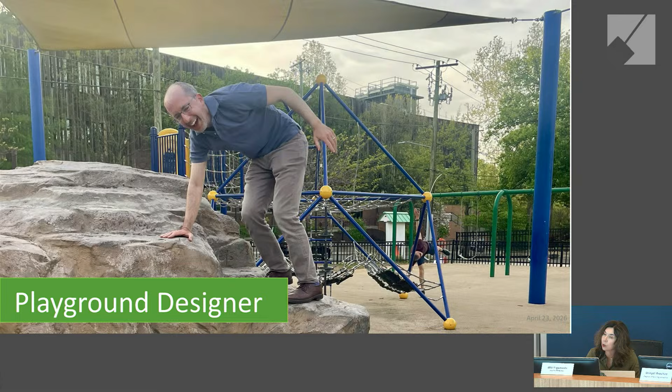Who loves playgrounds? Well, some people don't just play on playgrounds, they design them. Brian here in this picture is testing out a boulder to make sure that this boulder is fun to play on. That's part of the job.

Who likes playing in streams? Our aquatic scientists do that too, but they're also checking the water quality and studying the fish and the other critters in our streams.

Who here likes to do arts and crafts? Well, Chris is our exhibit shop manager. He is an actual real artist. He and his team build some amazing things like giant animals and park displays. Imagine building things that so many people get to see and touch in real life.

And who likes to go on hikes with their family, with their friends? Well, our trail planners like Kyle here get to design and build the trails that you walk on and ride your bikes on, and sometimes they test them by hiking or mountain biking.

Who likes ice skating? You could be like a princess like Elsa or Anna, or you could teach skating, or you could even, and this would be what I would like, drive a Zamboni. This is the best job ever, right?

Who likes to have a party? Well, this is Mike Coppersmith, and he is our party king. He throws some of the biggest parties in Montgomery County, like our Sligo Creek Fest. Just look at how much fun he's having at work.

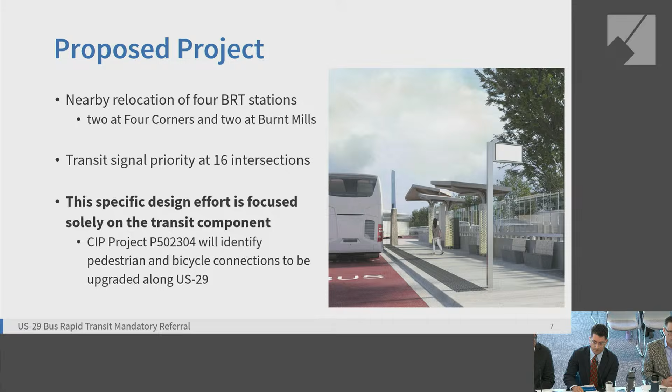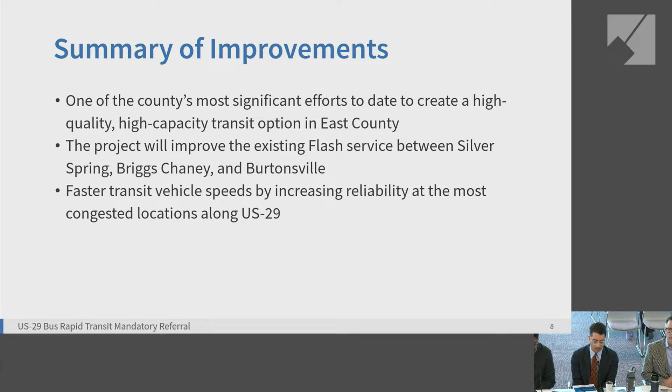This project is really one of the county's most significant efforts to create high quality, high capacity transit in East County. The project will improve the existing Flash service between Silver Spring, Briggs Chaney, and Burtonsville, with faster transit vehicle speeds. The project will allow buses to travel faster by increasing reliability and travel times at the most congested locations along US 29.

This project has been a long time coming. A vision for dedicated transit facilities on US 29 has existed since at least 1996. Bus rapid transit and dedicated lanes have been analyzed in at least 20 county and state studies and 9 countywide and regional studies. The planning board, as you might expect, has played a significant role in shaping this project over those years.

Most recently, planning staff led a detailed review of MCDOT's mobility and reliability study in 2020. That study evaluated different options for high quality transit on US 29. The planning board at that time pushed for additional county funding for MCDOT to further optimize the bus rapid transit concept. That advocacy was successful and led to additional funding that helped fund the 2022 addendum to that study.

After completing the Phase 2 study, MCDOT came back to the Planning Board for review, and the Planning Board at that time supported the median lane option detailed in that study. The county executive also supported the median lane option, and the council supported and funded the 35% design for the median lane option. That is the design under review today.

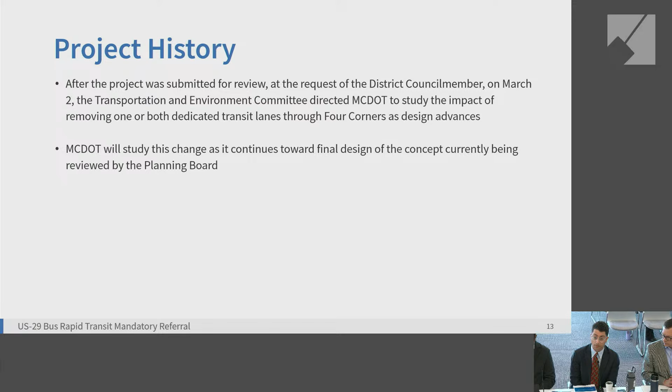MCDOT submitted this project to planning staff for mandatory referral in February of this year. After the project was submitted for review, at the request of the district council member on March 2nd, the Transportation and Environment Committee directed MCDOT to study the impact of removing one or both transit lanes through Four Corners as design advances. It's important to note that MCDOT will study this change as it continues towards final design, but they will be continuing towards final design of the concept currently being reviewed by the Planning Board.

Project overview, I'll turn it over to Nino. Thank you to the board for having us today.

Eli already went over the background of the project. I think it's important to go to the next steps and look at the overall program as a whole. MCDOT's BRT program is pushing several initiatives. We have a couple of projects in design now, MD 355 with Veirs Mill Road, starting some early construction as well. We have additional efforts in terms of planning studies, New Hampshire, North Bethesda, but today our focus is US 29, which is in existing service.

In terms of context, Phase 1 of the existing service opened in October 2020, connecting Burtonsville to Silver Spring. Service is about 7 to 8 minutes typically, operating every day, with buses operating on the shoulders along Tech Road.

As a repeat, the corridor length is about 5 miles. Phase 2 further implements and develops this BRT, going from Sligo Creek to Tech Road. It's a median running bus lane hybrid with several layouts I'll walk through: single median lane, two-way median lane, and mixed traffic. Our initiative here is completing 35% preliminary engineering, with station improvements at two key locations: Four Corners and Burnt Mills.

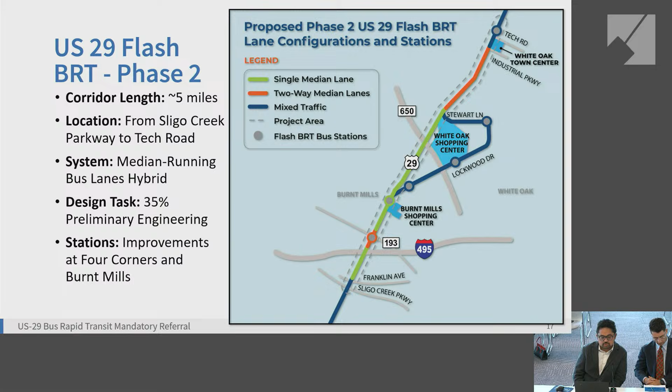There are key project elements regarding this project. In addition to the various layouts I just mentioned, there will also be new traffic signals, about 16 on this corridor. There'll be adjusted neighborhood access at several locations, and implemented bicycle and pedestrian facilities where deemed appropriate. We're also looking to connect them to the existing and proposed stations.

The next collection of slides shows a section of the proposed layout for US 29. Just to orient the board and audience, let me walk you through the graphics. On the top right of your screen is a legend: flash buses are indicated by orange, local buses by blue, and mixed usage of lanes by diagonal blue and orange. On the left is context of where we're located, and in the center is the presentation of existing conditions on top and proposed on the bottom, to help guide you through the next few slides.

The first section here is Franklin to I-495, the Beltway. We have an existing condition of 3 lanes of traffic in both directions with a pretty wide grass and concrete median in the center of the roadway. Right now, transit operates on the outer lanes, both flash and local buses. Our proposition is utilizing that center median and converting it to a strictly northbound BRT lane, utilized by flash. We are maintaining 3 lanes of traffic in both directions, and local buses will use the outer lanes. It's important to note that in this section, due to space constraints, the southbound flash will be utilizing the outer lane going southbound.

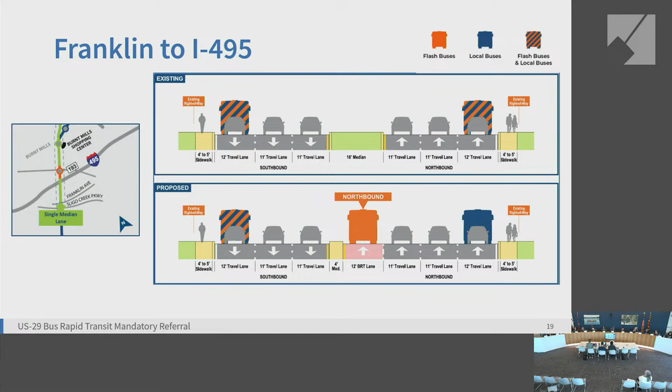Jamie Henson, I'm the BRT implementation manager at DOT with the county. Specifically, I think you also asked about south of there. Our project really stops at Sligo, so we're not looking south of Sligo. Our effort specifically doesn't look at the reversible lane section, which begins somewhere, I can't remember if it's Sligo or somewhere south of there.

As part of these projects, we're really trying to figure out how to shoot a gap on implementation that minimizes our property needs, that addresses the key issues, which are really in this corridor, commuter travel. This is a very high volume corridor, I think it's really the highest volume in the county. So it's much less commercial compared to our other corridors, and it's very peaked, highly peaked in the AM inbound, much more so than PM outbound. So that's why you see a lot of the intensity and benefit in the southbound AM direction.

When we did a micro-simulation analysis for this section, it turned out that south of the Beltway made much more sense from an analysis perspective, which is frankly a bit counterintuitive. You're saying the same things that were my first impressions when I saw it, which is why would we do that? The reason is because we felt like there would be more benefit. You end up with some slightly different patterns moving around the Beltway, which kind of mixes things up where you need to get to the Beltway to make movements. Our analysis found that northbound only was the optimal approach to move buses through the corridor.

And how that makes sense, but generally, what is the travel time then for the southbound buses from 495 into downtown? Because it seems like the configuration on the southbound side really isn't changing a whole lot. That's correct. So are we expecting any benefit, kind of a tangential benefit, from the other piece of the design?

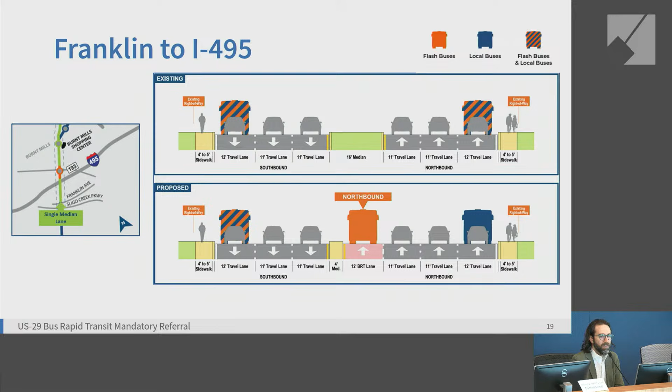Thank you very much. Next section here is going through Four Corners, a critical part of the project.

On the top of your screen is the existing condition, running from center and branching out to both east and west. You have 4 lanes of traffic from the existing concrete and grass median. On the outer lanes, both Flash and existing service is utilizing that for their service, and our conceptual proposal is putting in a 2-way running median BRT here, with a Flash station as indicated.

It's important to note that the 4 lanes of traffic in both directions will be reduced to 3, even though that outer lane is primarily used by local and Flash transit in the existing condition, and will continue to be used by local transit in the proposed condition.

Are we reducing one lane here in each direction? We are, to accommodate the median running BRT, yes. How can we do that?

The Four Corners is the most difficult part. I really have heartburn on this. I support transit, but not at the cost of making a nightmare even worse.

Yes, ma'am. There are future slides about this, but as Mr. Henson mentioned, some of the micro simulation and modeling was done as part of this. The team has travel time analysis comparing what would happen in the near future if nothing was done versus what the project is proposing, and it's not the doom and gloom scenario you're picturing. That's on the modeling side. Also, what's shown here in the conceptual configuration at the bottom is completely in line with the master plan vision for the corridor, in terms of the number of travel lanes and dedicated transit lanes.

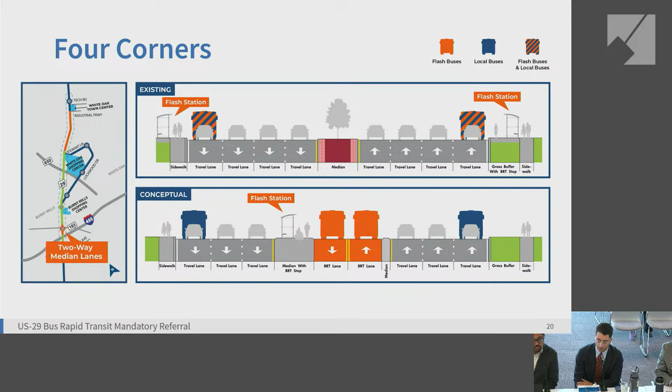Well, let's just think about reality. I know all the models and studies are just models. The reality, and I'm very familiar with it because I worked right there, is that we have a lot of intersections that already go to F. When we do this, they're going to be even more F, and I don't know if we'll have a double F or triple F. What is the impact? Maybe the models show it won't be much worse, but the only thing I know is that it's terrible right now. If we reduce one lane in each direction, it's going to be a nightmare for traffic there. I just don't see how that's possible. I support transit, but not at the cost of creating another nightmare.

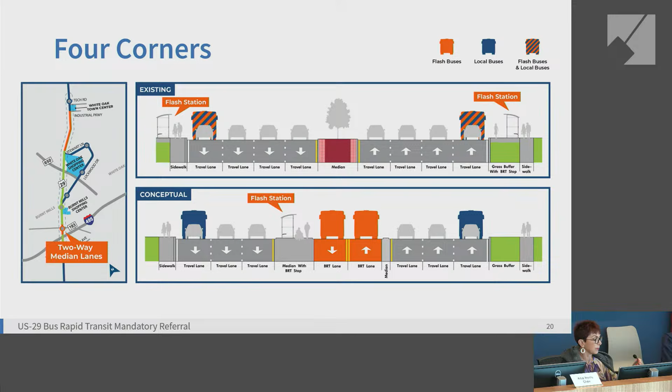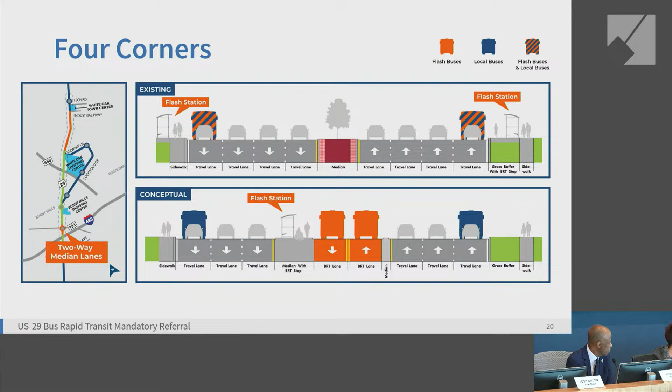Excuse me, I think they have a lot to go through and they want to hear all the questions, but why don't we write down your questions, and then let's get through this. This is a long presentation, and we can go through each one afterward, okay? If you don't mind, thank you.

Thank you, and just to reiterate that point, we'll go through the presentation, and this is a constant theme we've heard through public outreach. We've noted it as such, and we'll go into further detail as we continue.

The next section here is the Burnt Mills Shopping Center, just north of Four Corners. The existing condition is 3 lanes of traffic in both directions, similar to the rest of the corridor. Both Flash and local buses utilize the outer lanes, and there are existing left turn lanes in the center of the roadway, buffered by existing median concrete. What we're proposing is maintaining those 3 lanes of traffic in both directions while adding a southbound BRT with a Flash station.

So what's going to happen to the left turn? We are still able to maintain left turn bays, and as we continue through this Burnt Mills area, there will be a sharing of that roadway space between the BRT and the vehicles.

I didn't understand - is the left turn going to be shared with the BRT lane, or shared with the travel lane? Sure, let's walk through the proposed condition. It's a pretty wide section where the southbound BRT and Flash station is, and that projects through this Burnt Mills area of the project. Could you show it with your cursor? I'm having a hard time following. Sure, here we have this. I can see that.

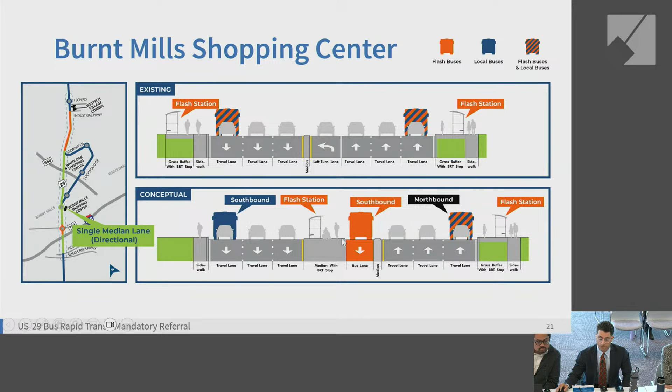Yes, this area is wide enough that where there isn't the bus stop, there's room for a left turn bay that's independent of the bus rapid transit lane and independent of the through travel lanes.

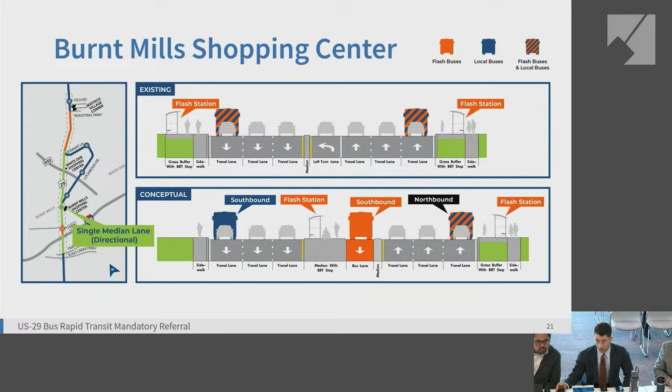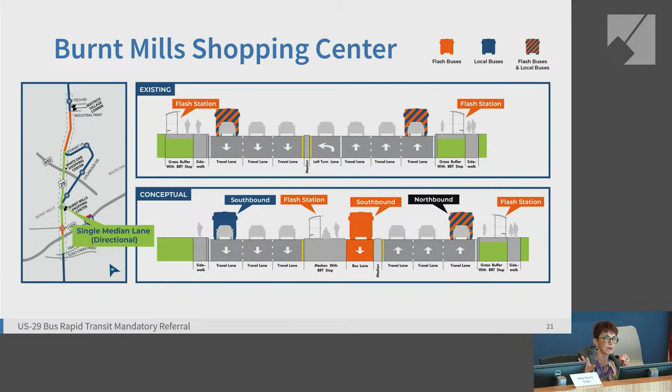Oh, okay, so you're going to fit it back there, so there's going to be a separation for the left turn, so it won't be interfering with each other. It won't come at the expense of either, it's separate. Okay, thanks.

I think you could also just click left or right if you want.

Next section that we're going through is Four Corners to Stewart Lane. Existing condition is 3 lanes of traffic in the northbound direction, 3 lanes of traffic in the southbound direction. Transit usually utilizes the outer lanes, and what we're proposing here is a peak direction BRT lane in the center of the roadway.

Depending on time of day, that BRT, whether it's AM or PM, will utilize that roadway space. 3 lanes of traffic is maintained. Local traffic is going to be utilizing the outer lanes.

It's important to note that in this particular configuration, the non-peak direction BRT will be sharing that with the travel lanes alongside the median BRT. So if there's any particulars on describing that, I can go through it right now.

Okay, I thought that when you get from Burnt Mills to Stewart Lane, BRT goes off Lockwood. I thought that's what you were planning.

Our primary focus is through the US 29 corridor. There is an existing spur that goes through that Lockwood area that we are showing on the map on the left-hand side, but this is primarily on US 29.

Oh, so that Lockwood one is not part of the BRT? I got it wrong then when I was reviewing it yesterday. Correct. And so for this one, what we're referring to is from Four Corners to Stewart Lane, except for Burnt Mills. I think that might have been part of your question as well.

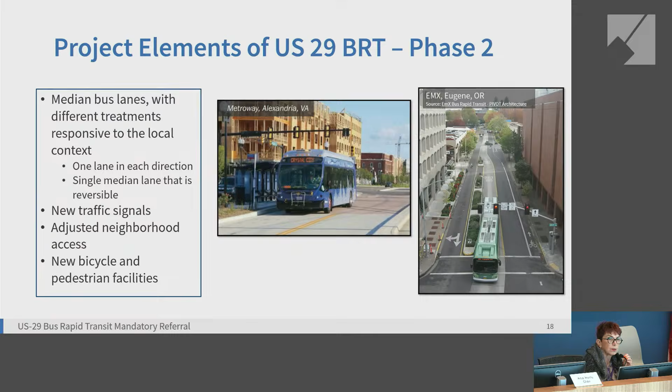No, I'm sorry, I misunderstood. No, we stay on US 29. So this Phase 2 project stays on US 29. So in essence, it's the blue line here that remains straight through.

So if you go back in here, the orange shows the flash. These are both flash services. There's an orange operation and a blue operation. The blue operation solely stays on US 29. The orange operation will benefit from the dedicated lanes for the portion that's on US 29, and then spurs off onto Lockwood like you've identified, and then comes back onto US 29 further north.

So that's a separate flash that is not part of the BRT? We're both getting a little confused. That's okay, it's a little bit confusing. These are different operating patterns. We have two operating patterns. Both are flash, but they're slightly different operating patterns.

They're both running at roughly 15-minute headways, and where they overlap, north of Stewart and south of Burnt Mill, the combined headway is roughly 7.5 minutes. They complement each other. In that middle section, we have one line that diverges to Lockwood and becomes quasi-local to touch all the development, and some service that goes over to FDA a few times a day and becomes quasi-local as it goes around that loop, then joins together to go back north.

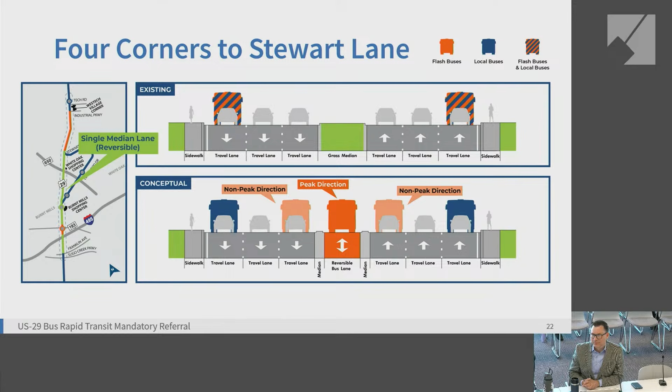So there are two flash buses. One stays on the orange, correct, that is 15 minutes, and one stays on the blue, that is also 15 minutes, correct. But when their powers combine, 7.5 minutes. Right, so that's the key.

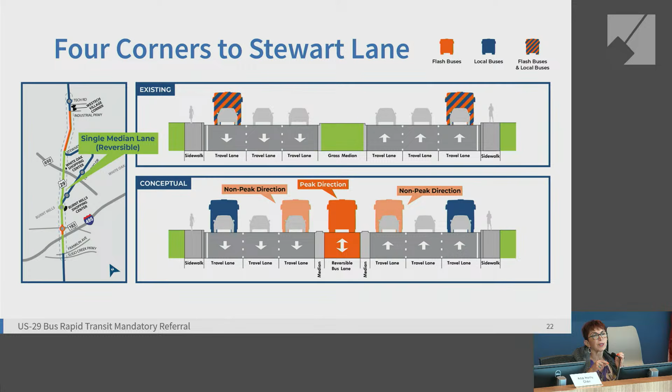Yeah, if they don't need to go to Lockwood. Correct, or you think that the time may be improved a little bit when it is separated, but the orange wouldn't be half, I guess.

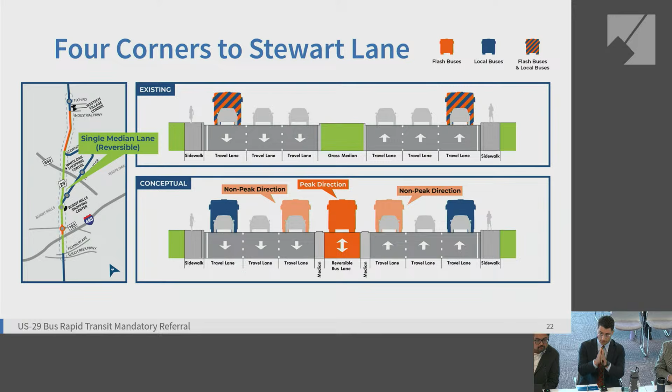The time will absolutely improve for the blue line as well, because the majority of its congestion is through Burnt Mills and Four Corners, which it shares. It's sort of the same service pattern as the blue. Okay, correct. Okay, got it. Thank you.

I'm sorry, I can't help it not say it, but this is the whole 5 miles. The only section that you reduced lanes was through North Four Corners. Everywhere else, the number of lanes stayed the same. But when you got to Four Corners, you reduced 1 lane on each direction. That doesn't make sense to me. Something should be done there.

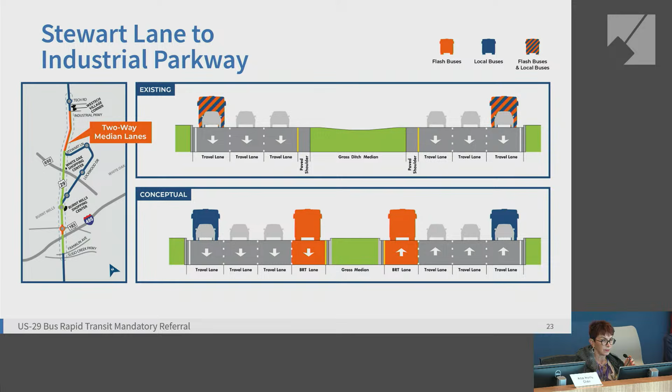No, when we, please, I know, I couldn't, please wait. I had to say it because they're finishing in here, they're not going to come back here. But they will if you ask them to come back. Okay.

Go ahead please, and we can certainly talk through it further, but Four Corners is the most difficult location on the project. There are businesses, and we've presented at the local church there that's right alongside the roadway, and it's a balancing act of trying to squeeze in this BRT. There'll be more pieces of information as we go through the presentation, and we can certainly go back to this.

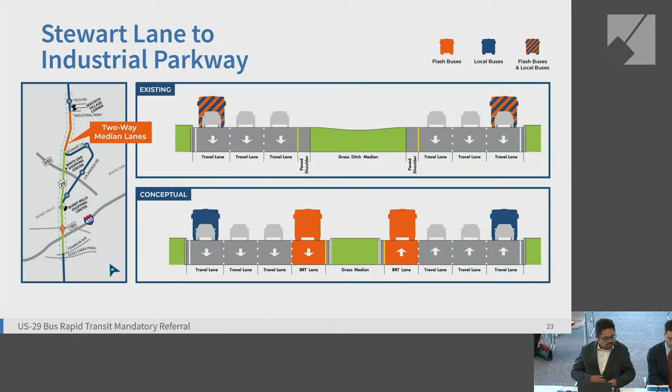Holistically, with a proposed median running BRT with dedicated lanes, there will be impacts to the intersections. There are 16 total signals here, 13 will have signal modifications, and there will be 3 proposed new signals. They're at Timberwood Avenue, Crestmore Drive, and Hillwood Drive. There will also be proposed left turn restrictions at Layton Avenue, Brewster Avenue, Lorraine Avenue, Hillwood Drive, Lockwood Drive, and Northwest Drive.

I want to take a pause here to focus on that. There are 2 parts to this. Besides the space concern of accommodating median running BRT, having the existing condition of uncontrolled left turns across 3 lanes of traffic is a safety concern. We've done our investigation, and there is a history of crashes at these intersections that we could certainly share later, and that's a benefit of restricting those left turns.

Back in June we presented this to the community, and we provided alternative access at either a nearby signal or an existing signal on the corridor to access the particular neighborhoods. So there is a way for people to make a left turn somewhere, not very far away. That is correct.

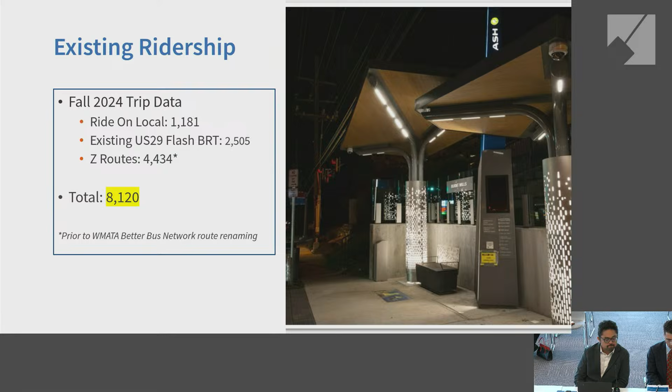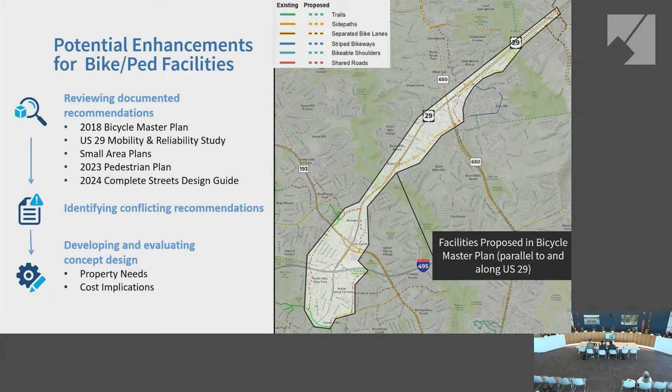I'm going over bicycle and pedestrian improvements. At the onset of this project, we wanted to assess potential enhancements for bike-ped facilities, a 3-part process. First is reviewing documented recommendations, such as the 2018 Bicycle Master Plan, the 2023 Pedestrian Plan, and the Complete Streets Design Guide. As we progress, we are identifying conflicting recommendations and developing and evaluating a concept design, focusing on property needs and cost implications.

So you have two efforts here. Just to make it clear, we have US 29 Phase 2 BRT, and then we are looking at the bike-ped improvements parallel to this, and what can be incorporated as part of US 29, and what can be split into a separate CIP, a separate project that doesn't preclude any of the improvements we're introducing.

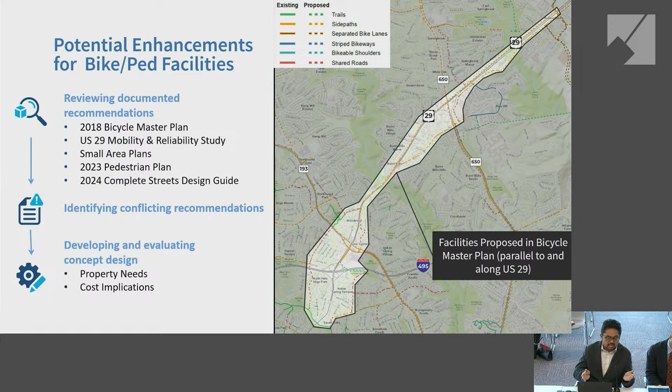In terms of station accessibility, we want folks to get to the station. There are several improvements we're looking at from the existing condition, including ped signals, median ped refuge - we are maintaining that refuge even though we are including BRT corridor wide - wider curb ramps, and access ramps to stations, all meeting ADA compliancy.

In a few slides I'll be going over public outreach, and we had a pretty extended amount of outreach throughout the neighborhoods of US 29. One of the key things that matched with assessing the existing studies and plans, and some of the public feedback we received, was focusing on Northwest Branch, specifically Crestmoor to Northwest Branch.

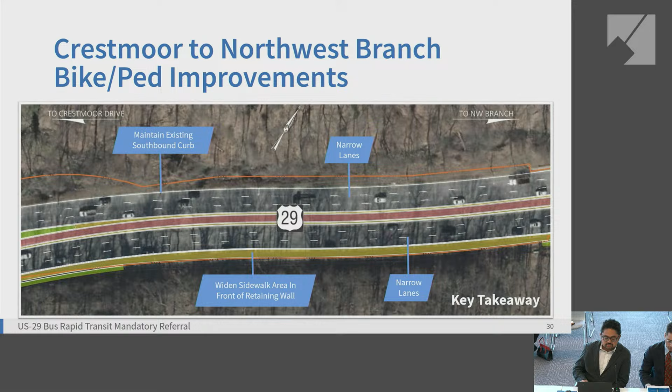The existing condition is a pretty narrow sidewalk, specifically on the eastern side, and we're looking to widen that path to accommodate both pedestrians and cyclists. To do that, we're narrowing lanes but maintaining the number of lanes, maintaining the existing southbound curb at the top of your screen, but widening the ultimate trail area on the eastern side. I'll focus more into that as well.

In the existing and proposed condition, there are 3 lanes of traffic in both directions - 3 lanes northbound, 3 lanes southbound - with an existing concrete median, grass median, which we're utilizing again for BRT. I want to focus on the far right-hand side of your screen. That 6-foot sidewalk is a high estimate; actually there are areas where it's closer to 5, even 4 feet, just because there are utility poles there, overgrowth. It's a pretty tight area.

With the narrowing of lanes and some curb line shifts, we're actually widening that out to 8 to 10 feet, which is arguably the only connection between these two parts of US 29. We're incorporating that as part of US 29/BRT. When you think about getting east-west in the county on a bike, this connection is one of the most tremendous pinch points that exist.

Having this project provide an opportunity to make this connection, to help connect Four Corners to Burnt Mills, to get to Trader Joe's, to get to the shopping center down there, is potentially very transformative for people.

I'm sure there are folks, commissioners, that have walked or tried to get down the sidewalk that Nino is talking about here, and it's brutal. It is brutal. So this is huge.

I'll add briefly - it was so much so that we felt we had to include it as part of this project, because if we left it off, as Mr. Glazer noted earlier, we've got a separate set of projects that will be in separate mandatory referrals, in different CIPs that will come to you. We felt it was so important to get this section because we didn't think it could be done after the fact, so we included it here in a way we didn't think we could get done later. It was that important.

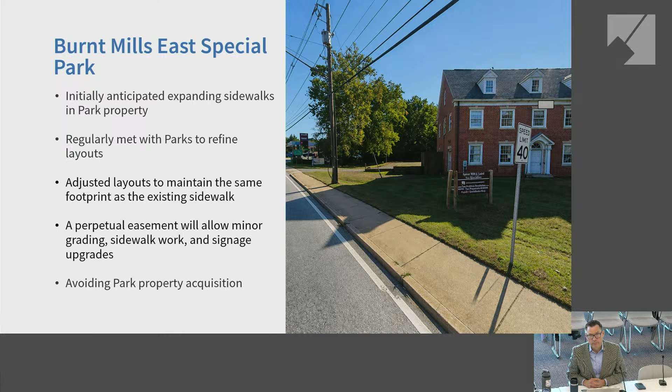Yeah, I think I would encourage us to explore options. Sure, and we're eager to do that, including options to expand it without moving the pole, whether that's a jog or just having the pole in the middle of the sidewalk. I know that's not best practice all the time. Well, but there are places where that's been done because other options aren't available.

Right. Okay, why don't we keep going here? Okay.

Going over the project schedule, we're in early '26 and going through the mandatory referral process. Depending on our funding situation, we'll progress to final design and work through right-of-way acquisitions, utility relocations, and construction toward the end of 2029 or mid-2029, but that depends on how funding is set up. We do have some 35% design effort that we're still wrapping up as part of the current work, and that's looking to close shortly.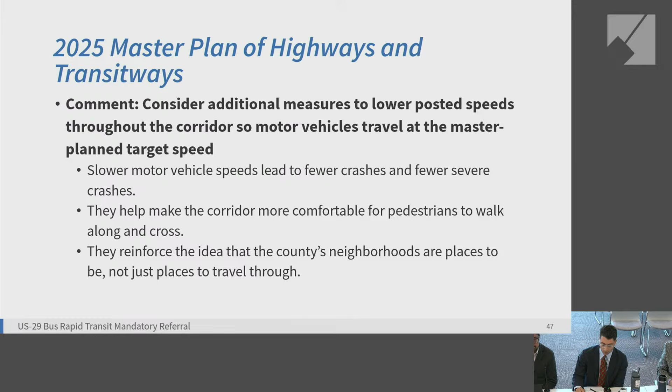The bicycle master plan has 2 main bikeways in the project corridor: the Burtonsville-Silver Spring Breezeway and the side path on the west side of US 29. The Burtonsville-Silver Spring Breezeway connects Silver Spring to Howard County by way of Burtonsville.

Generally it's on parallel streets to US 29, but within the section the project team has spoken to, it's right on US 29. It sort of branches off at Lockwood Drive. So the project team is making an effort to construct that, as we've discussed.

Again, probably not to the standard identified in the Complete Streets Design Guide, but within the existing space available between the retaining walls that cut between Four Corners and Burnt Mills, they're doing the job to the best of their ability.

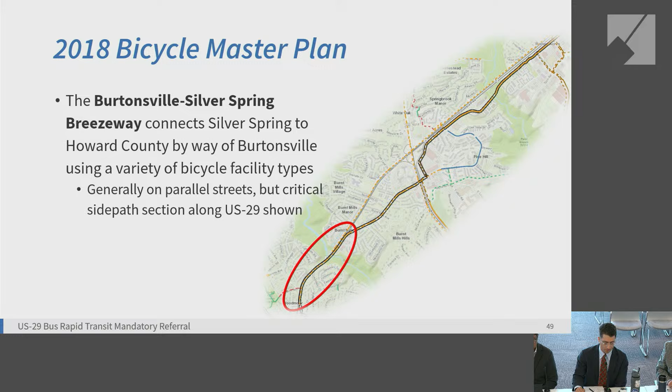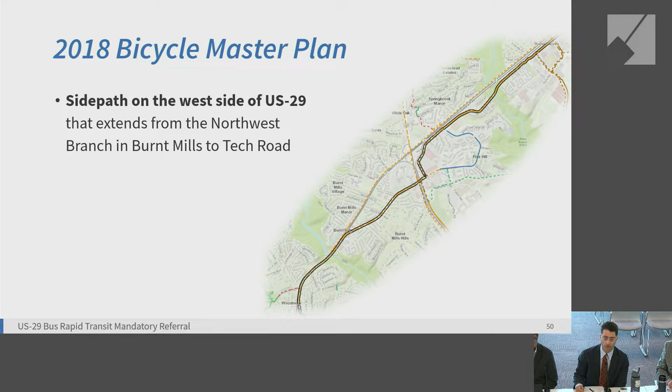On the west side of US 29 — the breezeway is on the east side — for the entire project extent there's supposed to be a shared use path, a side path, that's almost entirely unconstructed. This project specifically has no plans to construct it, but there is the separate CIP project that we talked about that will advance separately.

I think we find this project partially consistent with the bike plan because they're building that project we talked about, but their work does not preclude future improvements that the master plan identifies.

We have one additional comment the project team should consider. As I said, the master plan breezeway side path turns off of US 29 onto Lockwood Drive. This project also envisions closing what's now channelized like a free right from northbound US 29 onto Lockwood Drive.

The staff comment would be, rather than closing this for all modes, we should be maintaining access for people biking, because the asphalt exists already, and to the extent we can change the motor vehicle circulation — having them use the signalized intersection but allowing bicyclists to continue directly across — would be great.

I think that sounds great. Does this also include pedestrians in that too? There's an existing sidewalk along here.

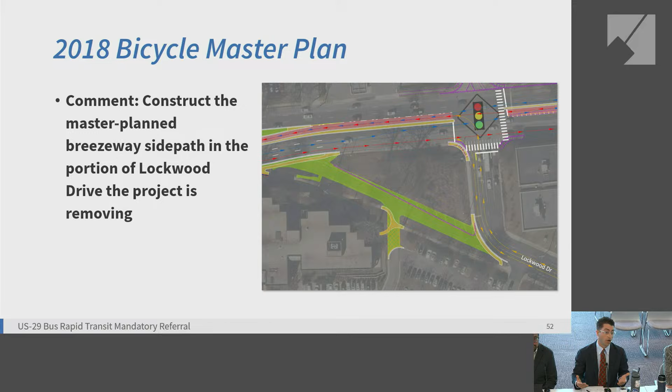So what we're envisioning is a side path that would transition, allowing people to continue in shared lanes on Lockwood or onto the sidewalk as they felt comfortable. The bike master plan calls for a side path on Lockwood as well, but that would likely only happen through future redevelopment. This is an opportunity the project presents within the scope of what's already being proposed.

So that's the comment. It would essentially be 11 feet, 12 feet, whatever, within the existing right-of-way that is supposed to be closed.

Area master plans, Four Corners. The 1996 Four Corners plan identifies that there needs to be a long-term solution for improving transit along US 29. Transit improvement was identified between Burtonsville and Silver Spring Metro. This is consistent with that.

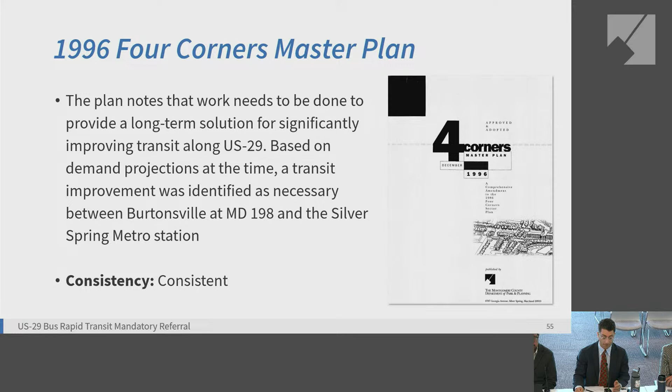The White Oak plan calls for improving pedestrian access to transit by providing sidewalks. This project is doing that, adding proposed marked crosswalks at the Lockwood intersection, and SHA separately is pursuing sidewalks on Burnt Mills Avenue and along the north side of US 29 to connect to this project.

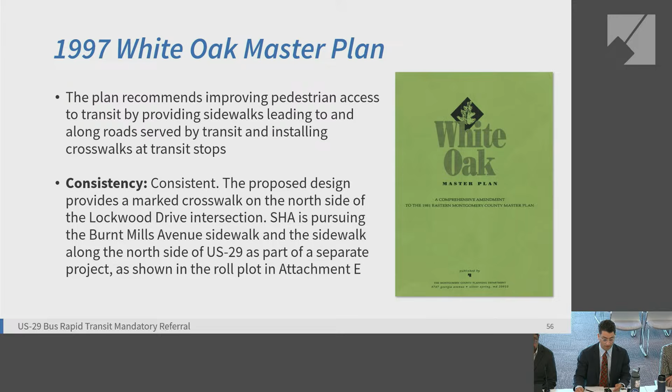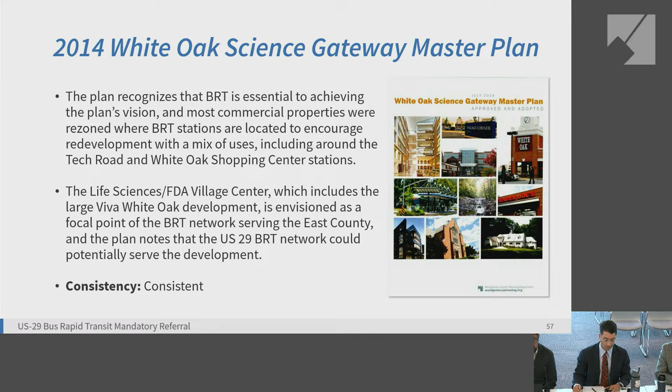The White Oak Science Gateway Master Plan 2014 recognizes that bus rapid transit is essential to achieving the plan's vision. The staff report included talk of Viva White Oak, etc. Providing a high quality transit option on US 29 was seen in 2014 and continues to be important to the success of those areas.

The 2023 Fairland and Briggs Chaney Master Plan sees bus rapid transit as a core component of the area's transit network.

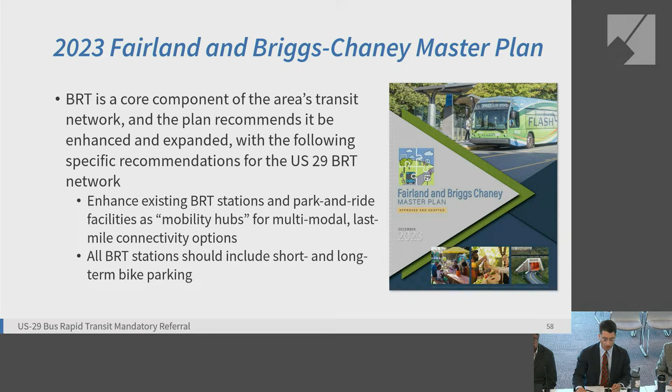We see this as partially consistent because while the project enhances and expands the service, the proposed station design does not necessarily have most of the features that the Fairland Briggs Chaney plan envisioned.

Mr. Henson noted that Flash is largely a commuter service, people taking US 29 to get to and from work. You may take a bus in the morning and then 8 or 9 hours later come home, and short-term bike parking isn't really appropriate for that. You're going to want a more secure bike parking option.

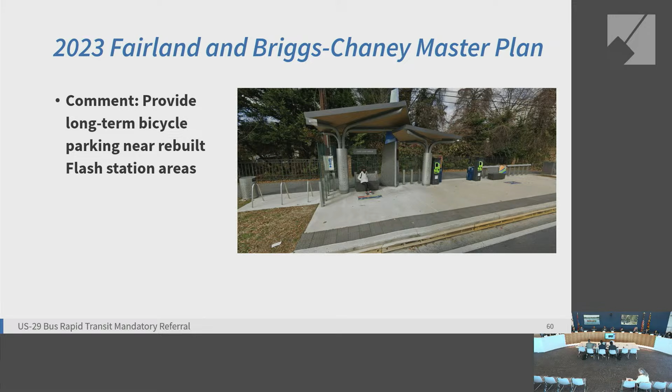University Boulevard envisions the full transformation of 3.5 miles of University Boulevard into a pedestrian-oriented multimodal corridor, with a more compact corridor-focused land use pattern. We find this consistent because providing high-quality BRT service in the plan area will support that more compact corridor-focused vision.

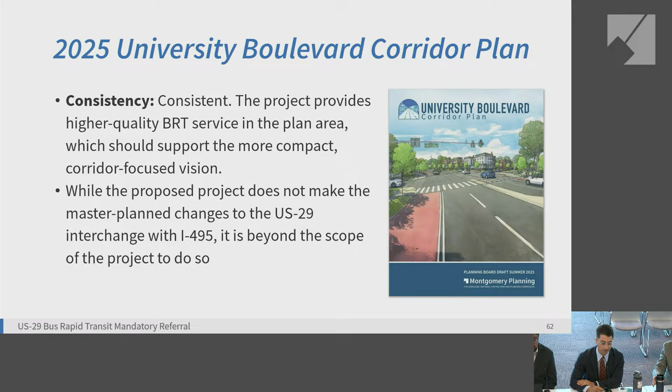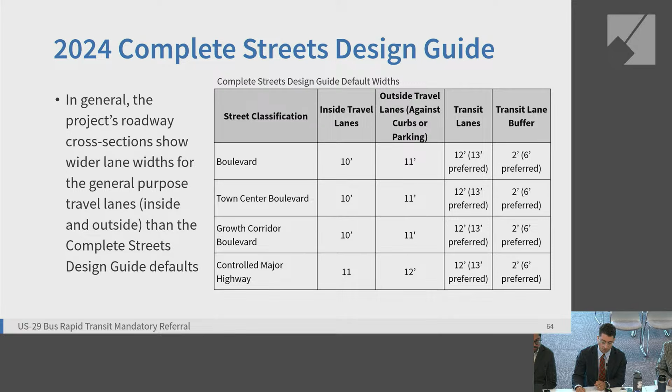Onto transportation best practices, the Complete Streets Design Guide. In general, the project's roadway cross-sections show wider lane widths for the general purpose travel lanes than the Complete Streets Design Guide defaults. Nino has spoken already at length about the impact reduction they've tried to accomplish using reduced lane widths to reduce right-of-way impacts and potential easements.

We also see additional opportunities to narrow travel lanes and use the excess space to provide additional transit buffers where none currently exist. There's a couple things at play here. The dedicated lanes themselves, and the fact that they'll be a different color, should do a lot to discourage people driving in them.

But there are sections, particularly where buses are expected to transition to or from the lane, that have no protection. I think the concern staff has is that in certain sections, not having that additional median curbing will encourage people to use the bus lane as a queue jump around congestion. It wouldn't need to be substantial, but at certain locations we should explore additional curbing to remove the temptation to do that.

So we've identified opportunities here at Lanark Way, northbound between University Boulevard West and Timberwood Avenue, and northbound and southbound between Stewart Lane and Industrial Parkway.

I think this suggestion sounds great. My only comment, which might relate to one of staff's other comments coming up about particular intersections, is that where there's a curb protecting the lane between intersections, but at particular intersections cars do make it into the lane, then they're stuck in the lane and can't get out. They may do that intentionally or not. If we recommend this approach, which I think we should, we need to think carefully about how to prevent cars from entering those points of vulnerability, because once they're in they may feel stuck, and that creates a dangerous situation for them. I think it's good and should be done, but there are design challenges here and there.

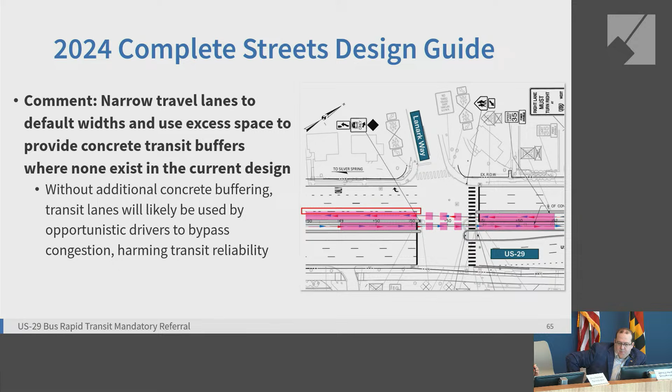I don't agree. But I think the evidence and research says that if you narrow lanes and install barriers, people slow down, and you're engineering a situation where driving is safer. Slowing down is safer, not more dangerous. Find another way to slow down. Then you want to kill people because we want to slow them down?

I don't think installing barriers and reducing lane size is going to be dangerous, it's going to slow the cars down. The danger is the car's speed, not the barrier. A concrete barrier introduces a danger to the drivers, period, that's a fact. Okay, you made your point. Let's keep going because we've got people who need to present their presentation, okay?

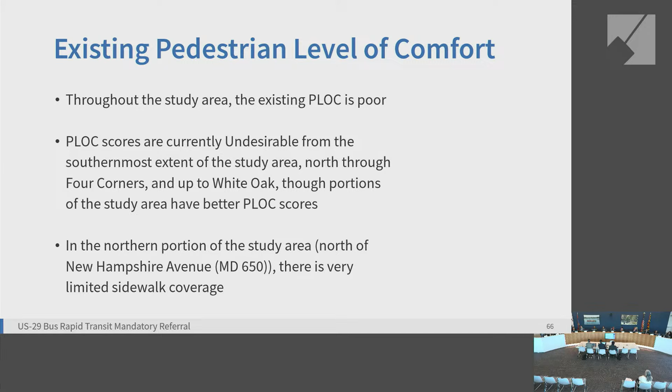Pedestrian level of comfort: it's no surprise the existing level of comfort for pedestrians is poor through this area. Scores are currently undesirable, the worst score, from the southernmost point of the study area north through Four Corners and up to White Oak. There are only very limited portions with better level of comfort scores. In the north portion of the study area, north of New Hampshire Avenue, there's very limited sidewalk coverage.

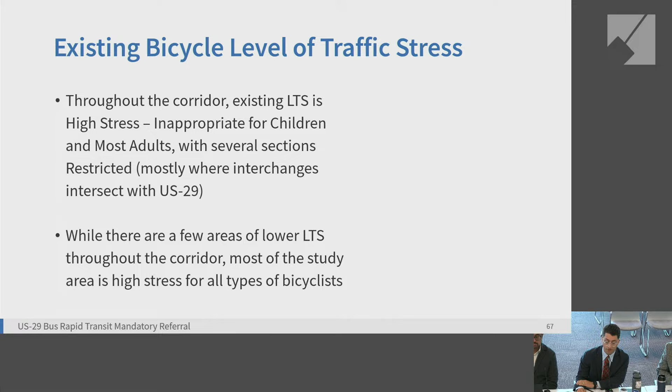Existing level of traffic stress for bicyclists is high, inappropriate for kids, inappropriate for most adults. In several sections you're not supposed to travel as a bicyclist, largely where there are interchanges that intersect with US 29.

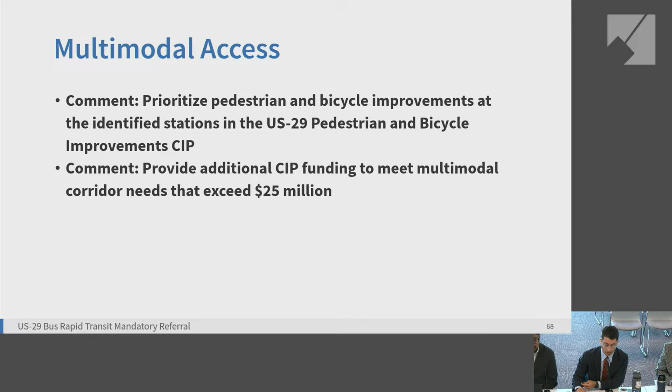The staff recommendation in terms of multimodal access, understanding that a separate CIP exists, is to prioritize pedestrian and bicycle improvements at the identified stations in the US 29 Ped Bike CIP, and then provide additional CIP funding to meet the multimodal corridor needs, which will exceed $25 million, given the challenges that exist.

And the priorities we identified in the staff report: for each station, our colleague John Ryder ran an analysis looking at relative pedestrian comfort and access to those stations, and then we looked at the relative daily boardings, or expected ridership, at those stations. So stations with worse existing pedestrian comfort but better existing daily ridership were scored highly and prioritized over stations with low ridership and higher pedestrian comfort, or some other combination.

So what we've identified is, for the CIP, we would ask that MCDOT focus on pedestrian and bicycle improvements to the Four Corners station, which scored the highest, and then Burnt Mills Shopping Center and the White Oak Transit Center, which were tied at the second priority, and then Tech Road as third. That doesn't speak to the specific improvements needed, but it's saying these are the stations that are least comfortable to access and have the highest ridership among the Flash stations.

So that's it. One quick question: what do we mean by, for Burnt Mills, this is the expected relative daily boardings, relative to other stations? It's relative to other stations, but is it expected boardings in the future? It's current, but I think we would expect relatively as boardings and alightings increase, that they would likely increase at the same rate across, so the ones that were already busiest would continue to be the busiest.

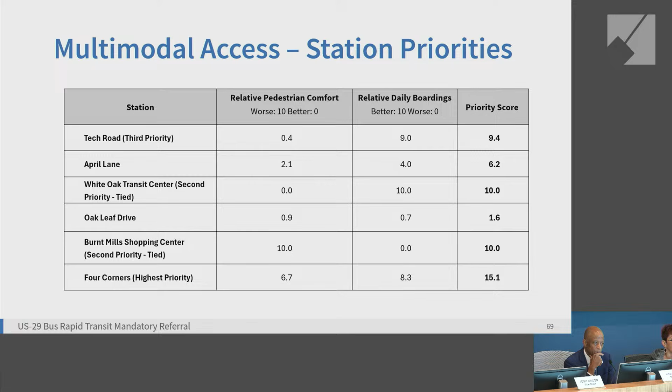Okay, other comments, just in general, we're nearing the end here. Standard comment, but just ensure that on the curbs that are being changed, we maintain the 15-foot radius, which is identified in the Montgomery County Code. Locations where curbs are moving that this would be applicable include Woodmoor Circle, Southwood Avenue, and Crestmoor Drive. The tight turn radii obviously reduce turning speeds, improve visibility, and reduce the likelihood and severity of collisions.

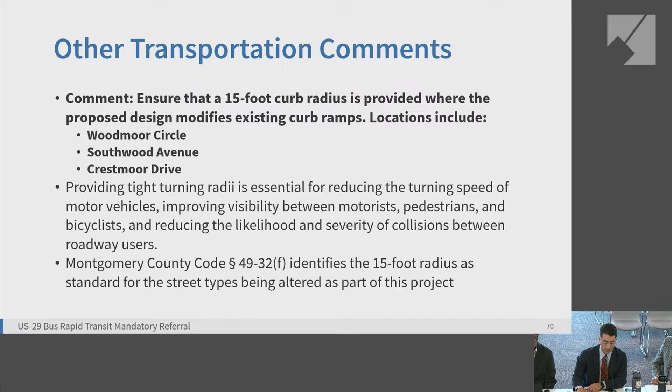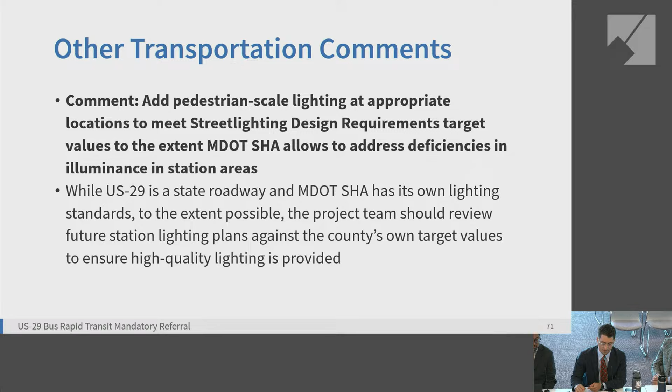Add pedestrian scale lighting at appropriate locations to meet the street lighting design requirements target. Obviously this is a state road, so to the extent that MDOT-SHA allows, the street lighting design requirements that the county has should be used as the metric to address deficiencies in the illuminance of the station areas.

Other comments: consider changes to the US 29 median at Timberwood Avenue to prevent left turns from the westbound approach. The proposed triangular median, which I'll show in the next slide, is intended to allow transit vehicles to transition between curb running and median running operations, allow cars traveling southbound to turn left onto Timberwood Avenue, prevent cars from driving from one block of Timberwood Avenue across US 29 to the other block, and prevent cars from turning left onto southbound US 29.

I'd like to make a comment. You're showing streets and giving street names, and giving a micro-focus snapshot of it, so we can't really make heads or tails of exactly where these streets are on 29. Is there any way you could give us a map and show exactly where these streets are? I'm familiar with 29, I travel it every day. Sure, but I'm not specifically familiar with the individual streets.

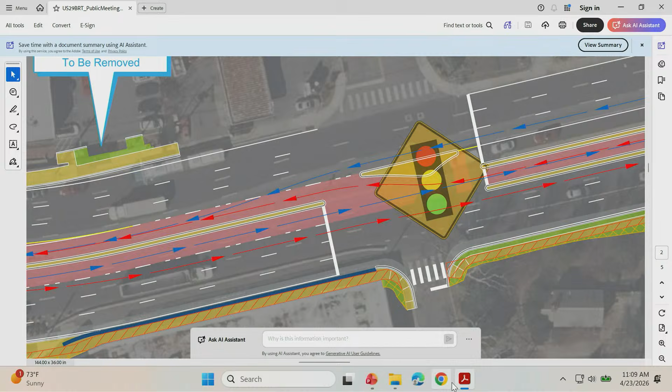It's right next to the CVS, right here. So this is what's shown. The recommendation from staff is to do something to this intersection to limit the likelihood that people will make that illegal left turn from Timberwood onto southbound US 29. The CVS in this graphic is right here where my cursor is. That could be done a number of ways. You could add a median barrier where this blue line is, or extend the median proposed on the other side to make that connection visually unappealing. Something should probably be done to limit the temptation to make that left, especially across multiple lanes of traffic.

Is it prohibited right now, or can people make that left turn? If it is not prohibited and we want to make it no left turn, what are the other options for people? This is a very congested area, and that turnaround at North Four Corners is very confusing for how people make it. So I understand you believe this is a difficult movement and should be prohibited, but is there another way for people to do it? Maybe put up signage and wayfinding so if someone wants to make a left toward the south of US 29, they know where they have to go.

Commissioner Pedoeem's comment, I echo that, not just for this but as we talk. I know some people in their testimony said they didn't want left turns eliminated in certain places. As you talk, either now or in the future, when you say you want to eliminate something, also say how people will be able to navigate if you eliminate that, so they have other ways to get there, and whether it does or doesn't increase travel time. And the driving also matters, because it means more air pollution. We just don't want people making circles. The important thing is that when we prohibit a movement and set up a detour, we need to make sure we have the wayfinding and signage to direct people while they're driving, so they don't get distracted and know where to go.

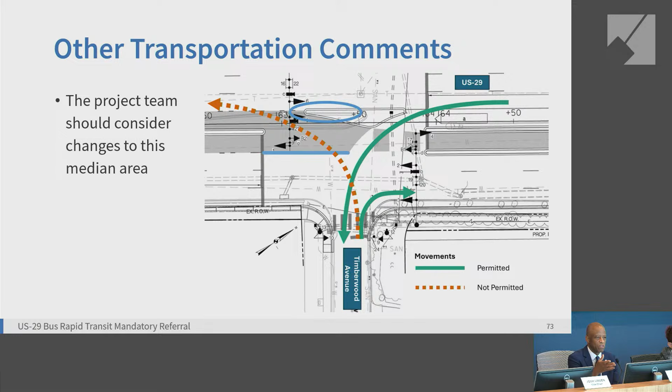But I also want to make clear, this left turn is already prohibited. You can't do what you're not supposed to do. I know, but there were some other places where, by having the bus, you could not make turns through there. And in those kinds of cases, just— We have, yeah, I think the project team has slides that can speak to those locations. In this specific location, the existing configuration is that it's prohibited, and it's incredibly important that that movement not happen, because it would put people in direct conflict with buses that have the right-of-way, which is incredibly dangerous.

But by signage, that was my first question. I didn't know if it was prohibited or not. If it is prohibited, it has to be very clear that it's prohibited, so signage is very important. And if there's a better way to make the left turn, you direct them with signage to where they could make that left turn.

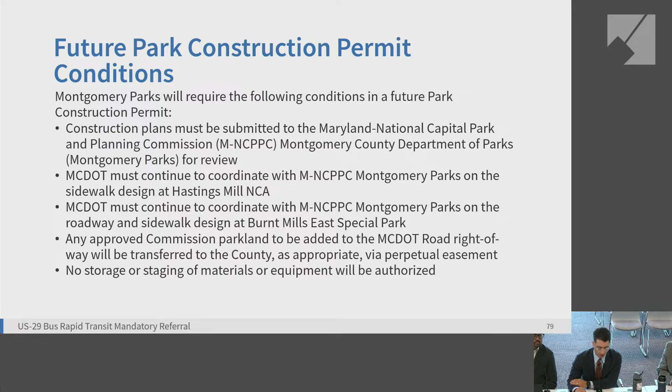On the park side, as noted, there are no park impacts that we discussed, but in future, as the design advances and this moves towards construction, to the extent that there are park impacts, Montgomery Parks will have the following park construction permit conditions, which are standard about construction plans being submitted, coordination on sidewalk design, coordination on design on Burnt Mills East, like Nino discussed, and then some other comments about easement that were already discussed. At this point, I would turn it back over to the chair.

Great. Thank you for your detailed testimony, a lot of information there. So we have 10 speakers.

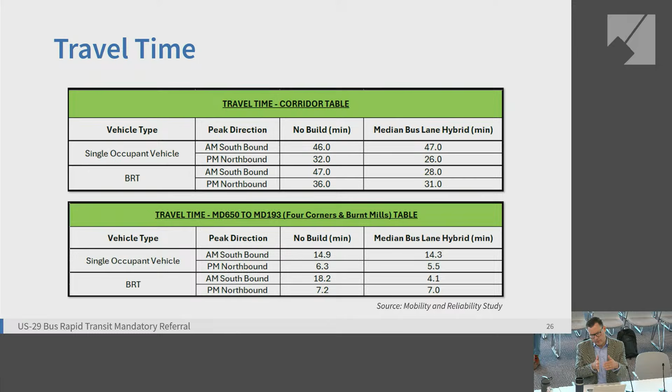Now, I think, I can't recall if that's all center or if it's on the sides, and I can't remember the exact running way. But that is also in the center. Our colleagues in the city of Alexandria and Arlington County have their Metroway service. We would actually begin to mimic some of their station layouts in the middle.

So maybe I misunderstood. So all of your boarding for this new system is all center? I'm sorry, no, it varies. So I think what Mr. Henson is saying is that the service pattern, the directionality of the dedicated lanes, how it's broken up into individual sections. In the locations where there are two dedicated lanes, like through Four Corners, both stations in both directions are in that median space because always people will board and alight in that median space.

North of that, in Burnt Mills, one of the stations is in the median in the southbound direction because it's always southbound in that location, and the other, in the northbound direction, is on the curb, because it's always going to be on the curb. What we don't want is to create a situation where, based on the time of day, somebody's waiting at a station that is not actually being served because that service is in the dedicated lane. Also, that avoids spending extra money constructing transit stations that you don't need.

If I could add, the mobility and reliability study adopted the median hybrid version. There are other iterations of this that looked at a more consistent layout. Due to the nature of the corridor, as you mentioned, Chair, there are residential areas, commercial areas, and they need to be treated differently as such.

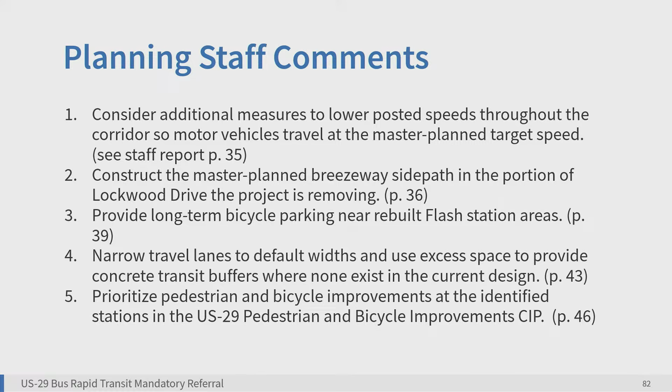Right, great, thank you. So there's 2 slides. The first slide: additional measures for posted speeds, the breezeway side path on Lockwood, bike parking, narrow travel lanes, prioritizing improvements, and then Timberwood Avenue changes, lighting, curb radius.

And then we had also talked about, from Commissioner Linden, some sort of vertical separation or barrier potentially on the proposed wider sidewalk side path on US 29. And then we'd had a conversation about the Burnt Mills East side, potential sidewalk widening with parks as well.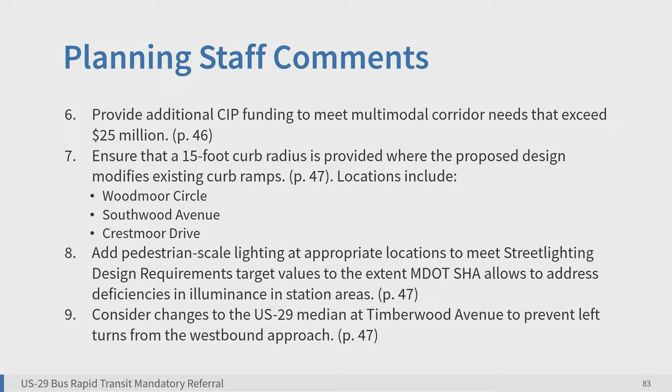And could I add one thought to put in the mix here too? Would it be possible to go back to page 73 for a moment? I'm just going to use this page as an example. There's nothing specific on this page I wanted to note, but I just want to use it as an example.

So the crosswalk going across Timberwood is a bit off, it's not entirely perpendicular. It's a small thing. The curb ramp is also pointing more diagonally into the street instead of straight across. I think in most cases, although I haven't reviewed the actual designs across the entire corridor, I would recommend a strong preference for crosswalks that are directly perpendicular to the extent possible, and curb ramps that point directly across, for people with visual challenges so they're not directed out into the street.

Eli mentioned before the curb radii tightening. I would second that, but I think that's already a comment. But these kinds of things, the more that we can be consistent with this, these are pretty significant accessibility issues and benefits if we can get these right. So I would put in a plug for that.

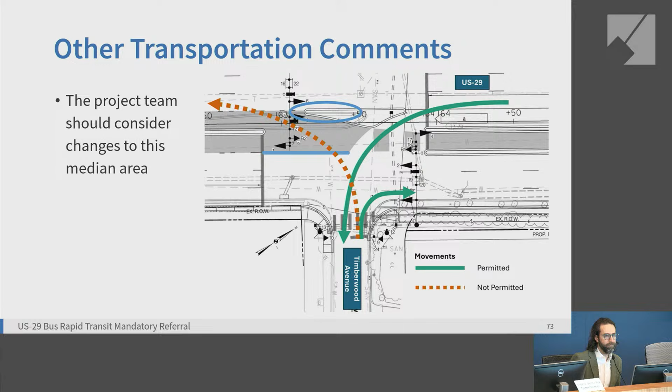Certainly will, and the plans that were submitted for mandatory referral do not necessarily reflect the latest condition. We've looked to add crosswalks at the signalized intersections where, for example, Timberwood is not signalized currently, and we'll look to shorten the pedestrian crossings as much as possible.

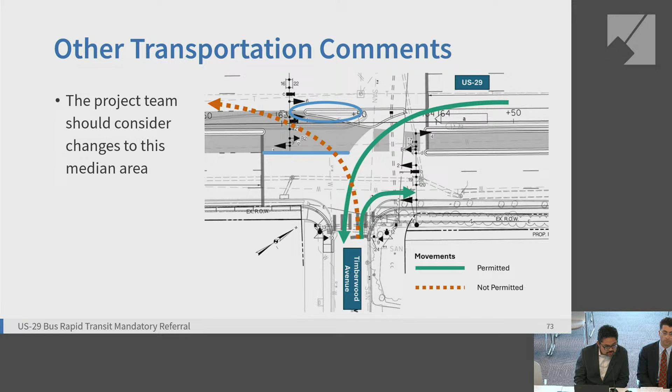Yeah, shortening's great for sure, and straight across. These are the types of things I know the planning staff always focuses on with other mandatory referrals, but just baking that in across the board. That's my only addition there.

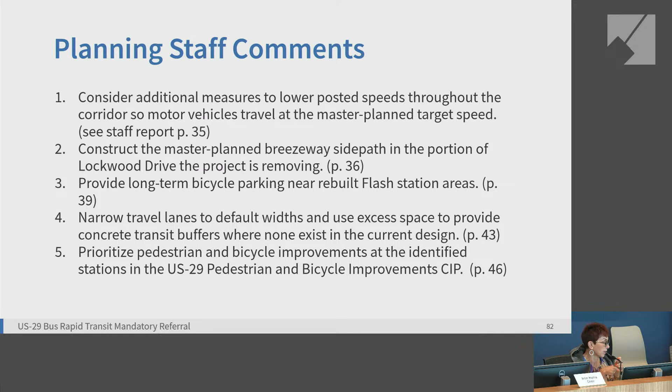Any other comments, questions from the board? Could you go through your comments? Because I don't agree with that comment to reduce the number of lanes and instead put a concrete barrier. In my opinion, that was not safe. I do not know if that's part of your comments. I was trying to check on my computer.

So comment 4 is to narrow travel lanes to the default widths. Against a curb, that would be 11 feet, and use the excess space to provide concrete transit buffers where none exist in the current design.

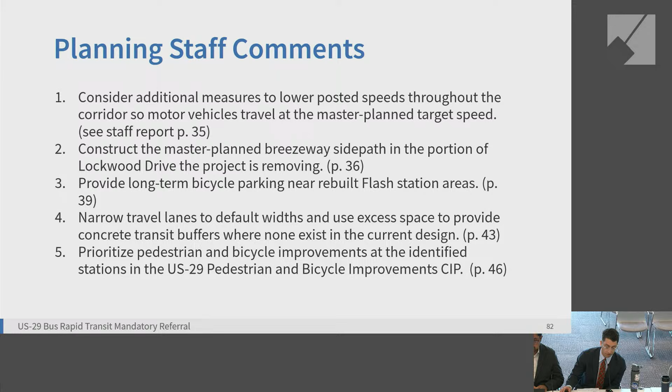I don't agree with that. I think we wanted to clarify what those would look like first, if that's okay. They would be standard curb height, as opposed to something like a Jersey barrier, much lower to the ground. The lanes, as proposed, are 12 feet wide. They could be reduced 1 foot each, 2 feet each. There could be a combination.

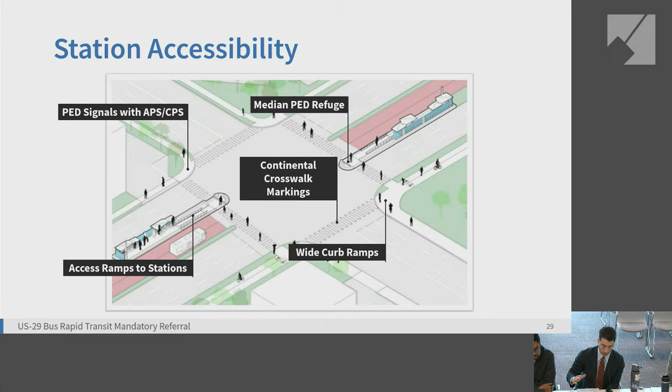It's a buffer, not a barrier. Barrier sounds much more severe. It's a buffer. I don't like the idea of a concrete buffer.

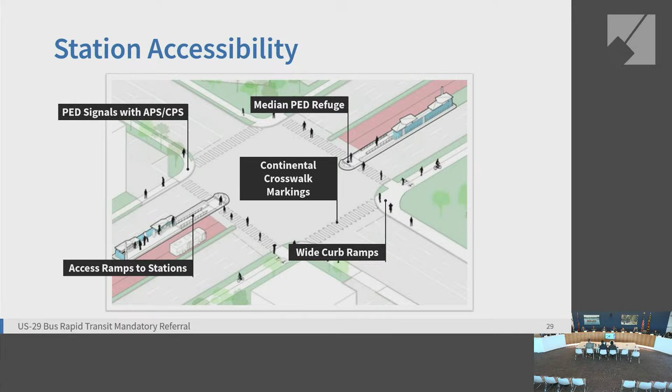It is not safe. I have personally hit, not at fast speed, a concrete curb at the edge of the sidewalk. I was going 25 miles per hour and I didn't see it. It was right next to the lane I was going in, and it completely damaged my car and I was shifted. This kind of thing is not safe. I do not know if that's a common practice that we have been doing.

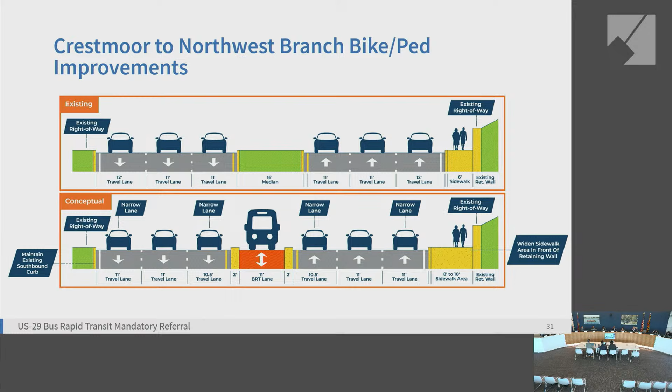Is it a common practice? Well, it's not dissimilar from when, with protected bike lanes, sometimes those have concrete buffers. But there is space. This would maybe be, depending on how it's designed, slightly wider but a similar height off the ground to what you'd often see with a protected bike lane. There are reasons we choose more hardened buffers like that, because they're more effective, and also more visually effective.

Effective for who? Well, it has to be safe for everyone. The goal is to keep vehicles out of the lane, and there are ways to make them very visibly noticeable. We're not trying to hide them. The purpose is to make them very noticeable, so everyone's aware of where they are and everyone can stay in their own space.

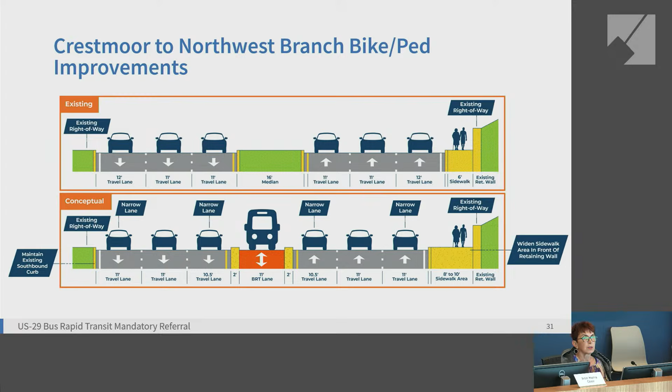Okay, is that a common practice? Do we have them anywhere else? If it is a common practice that is approved, then let's use that terminology. If it's just something we are making up and it hasn't been used much, then I have a problem with it.

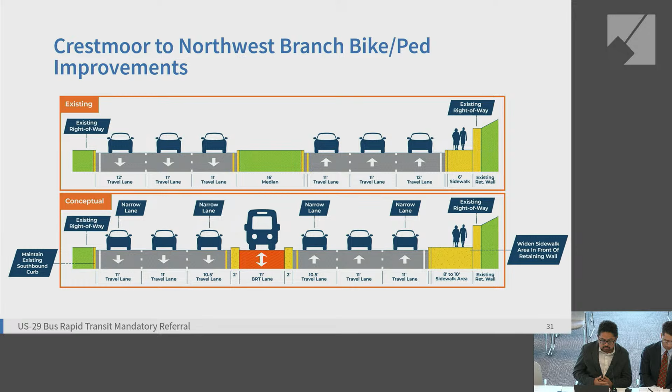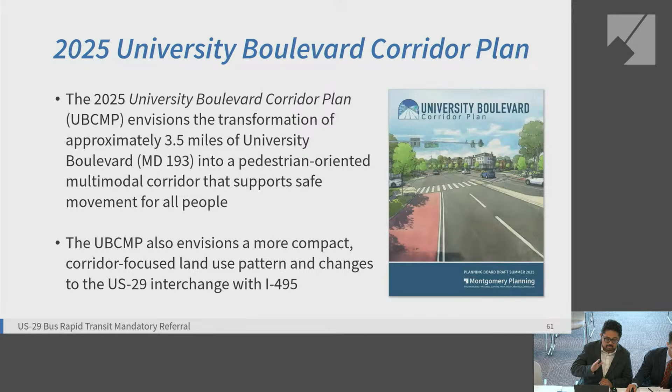Just to add to the conversation, these concrete buffers help separate the different modes of transportation on the corridor. We're at 35% design currently, so there's a lot of control we still have for these particular design elements. There's curb reveal, there's also various types of curbing we could use, and this is very different from the barrier—the barriers are mostly limited to just the stations. Corridor-wide, you have that existing condition now with travel lanes alongside concrete curb at various heights. So those are the things we have control over, and that is a practice to separate modes of transportation.

That's fine, as long as it is something widely accepted for safety and consistent with standard traffic design. I'm fine with it.

I just didn't like the idea.

I'll just add, we were in Long Branch earlier this week for our Eastern Silver Spring plan, and as I was walking through that area, I noticed they have this exact type of thing implemented for the Purple Line. And it's great because this really separates the Purple Line from the through lane traffic, making that distinction clear, as long as there is proper space, distance, and design. I just didn't see much space there—for half a foot, we wanted to put a barrier. I said, that doesn't make sense.

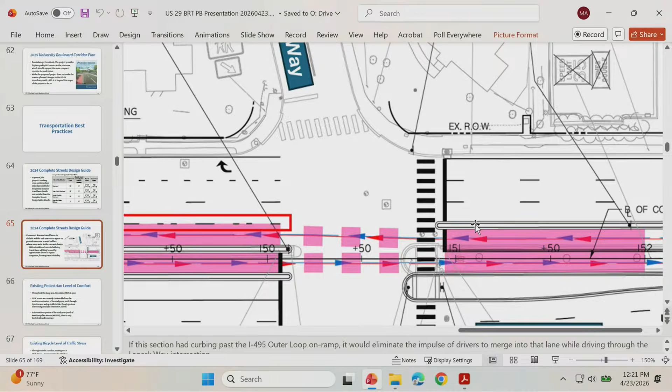I'd like to add some comments. I've been waiting patiently, so you might have to forgive me the length of my comments. But first and foremost, I'd like to thank the citizens that showed up on Teams and in person to have your voices heard. I know in some of our workaday lives, we don't have the opportunity to show up and have our voices heard, but your voice is a vote, and it's meaningful to me. I not only hear you, but I listen to you.

And upon listening to you, I understand that you do not like this project and you don't want it to go forward. And if I had a decision as to whether or not I could say go forward or not, I would side with the citizens and say not go forward.

Mr. Ansbacher pointed out that the board won't accept or reject the project, but provide comments on the project design. And I do have comments on the project design, but fortunately we have a well-informed board member who is not only an expert with regards to engineering, but an expert in the life of the roadway, experienced it firsthand, similar to me. Instead of making the same comments as that board member, Mitra, I would just say I co-sign anything that Mitra said with regards to this, without amendment or edit.

She captured the reality of this roadway and the reduction in lanes. One of the things I find interesting is that one of the most dangerous intersections in Montgomery County is the intersection of Route 29 and University Boulevard. I don't know if it's the most dangerous, but it's one of the most dangerous. What I find interesting is that during this presentation, nobody mentioned how it would make that intersection more safe, and how the citizens who use it more often would be better off with the suggested improvements to this roadway, including introduction of BRT and reduction of the lanes.